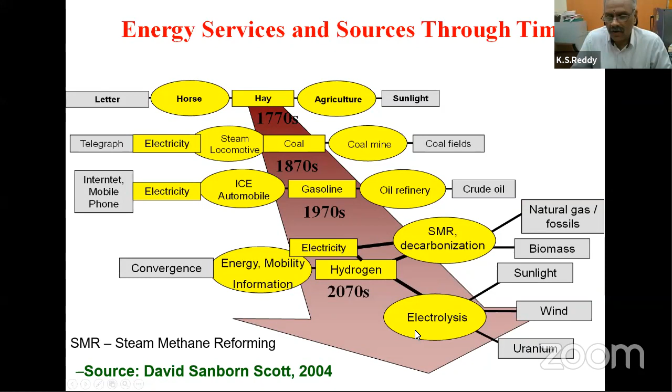Of course, there are various methods by which one can convert these into secondary forms of energy carriers. So I have listed here 2-3 energy conversion systems, mainly electrolysis, SMR, decarbonization, and so on.

So for human survival, basically three important requirements are air, water and food. Somehow we are getting air free of cost, though it's highly polluted, but still we are not paying for the air. Whereas for water and food, we are still paying, because water we cannot use directly from natural sources, so there is a huge energy requirement for treatment and so on. But food is available naturally, but we cannot eat it directly.

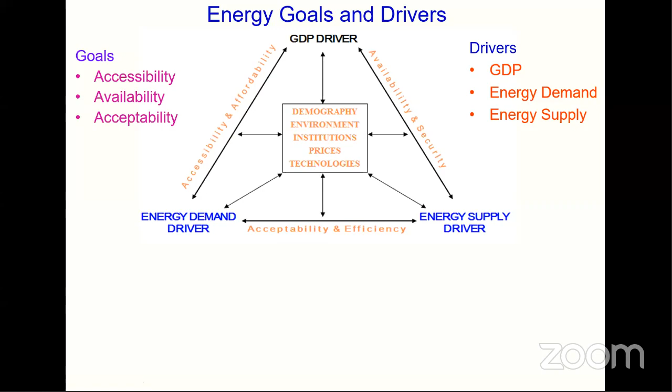Through these goals and drivers, though I mentioned the 3A criteria - accessibility, availability, acceptability - this is much bigger than that. It includes the 6A criteria: accessibility, affordability, acceptability, adoptability, and of course appropriateness, assurability of the energy sources for given energy demand or energy supply drivers or GDP drivers.

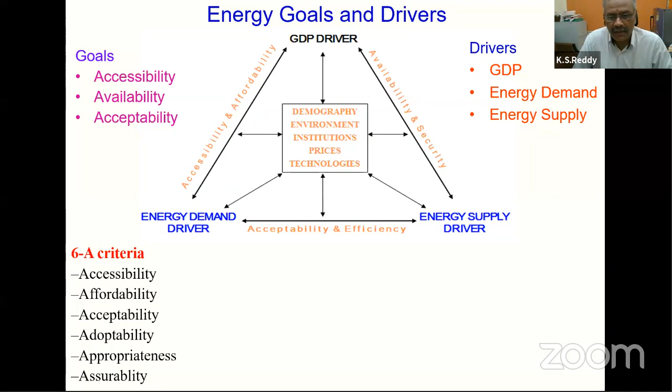So therefore, in order to have these energy sources, if you look at the global outlook, it's most importantly fossil-driven - the present energy scenario is driven by fossil fuels. Those fuels include coal, oil, gas, and of course nuclear. As far as India is concerned, we import all the energy resources.

We import coal from Indonesia, Australia, and South Africa. Oil, you know very well, comes from the Middle East. Gas also from the Middle East. Nuclear again from Australia and others.

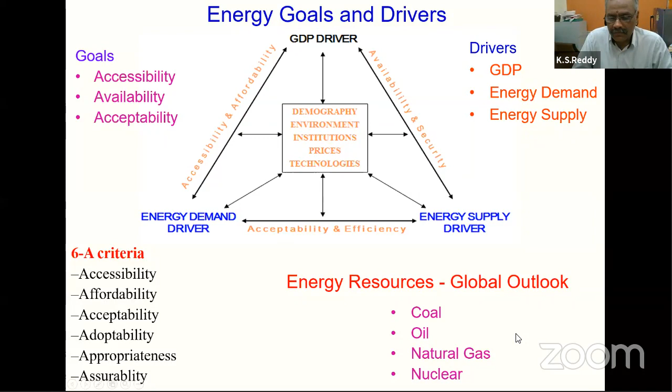Though we have limited nuclear installations, most of the energy supplied is based on fossil fuels. So the energy sources for mobility is very important, which is the present topic of interest. I will try to concentrate on how energy sources are important and what developments are happening in electric vehicles, mainly the activities taking place at IIT Madras in our group. The energy source for mobility is oil, and to some extent gas, but oil is very important, and the present scenario is based around oil as a fuel.

If you look at global oil reserves, it's estimated at about 1147 billion barrels, and you know very well how these are distributed. This distribution of oil is not uniform, so India still imports a lot, about 65 to 70% of the oil, from the Middle East and other countries for mobility applications and other utility.

The crude oil prices are highly volatile. Prices have ranged from, we have seen once, about $140 to $150. Now it is moderately less because of the supply-demand relation. In developing countries like India, where we don't have much oil reserves, the import is primarily driven by demand, and consumption is increasing day by day. So it's very important to take care of these things.

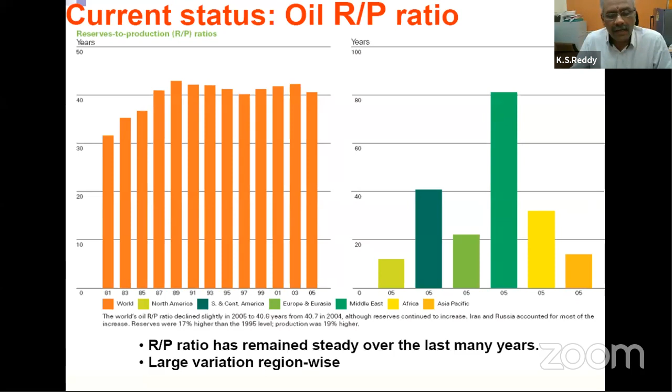So one should really look at alternative options for mobility, and the electric vehicle option would be one of the attractive options. For the oil scenario, we have technology which can drill deeper and deeper to exploit resources from even farther reserves, but the cost and economics is a major issue. The present technology can drill up to 1.7 kilometers deeper and still get results.

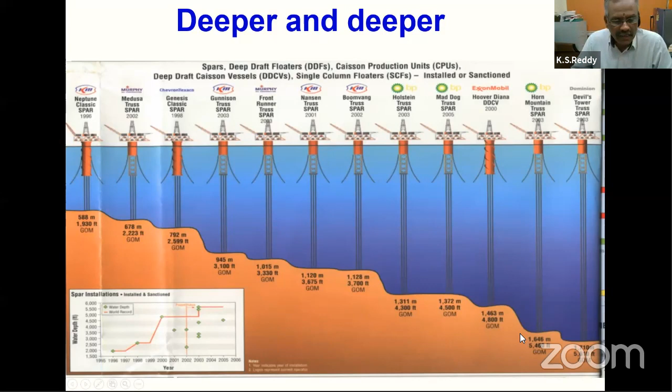The fuel is also, as I mentioned, about 70% imported oil, so most of these vehicles are driven by foreign oil. This is not Indian technology, so we have the money to afford to buy it and to afford to buy the fuel, which is also not Indian fuel. So we are using foreign fuel, foreign technology, operating on improper or poor infrastructure—mainly roads and other things—which results in polluting the Indian environment.

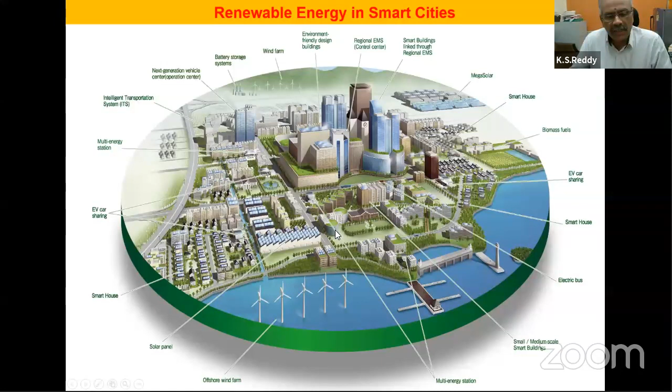You have to conserve your earth by going for alternative methods. We conserve through electric mobility, which is a non-polluting or less polluting option. Therefore, renewable energy options in smart cities are very important. You can cover the city with various renewable energy sources and use them for charging stations and catering to the needs of the system.

If you go for mobility, there are alternative and transitional energy sources for transportation. This includes renewable energy for transportation, covering both transient-with-storage and only-storage options. Transient options are very simple in construction, using active systems, but have lesser reliability and are not suitable for frequent use, with less maintenance and low capacity applications.

With transient and storage systems, we have relatively better reliability, active and passive systems, and reasonable simplicity, with possibility of storage and compactability, suitable for long travel but with relatively high maintenance. Only-storage systems are very simple but challenging, with high reliability, and most of them are passive systems.

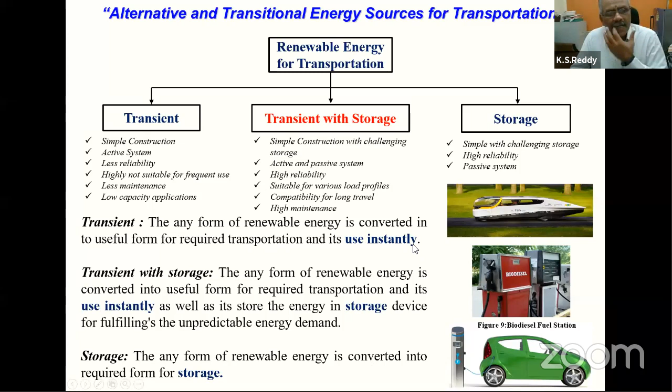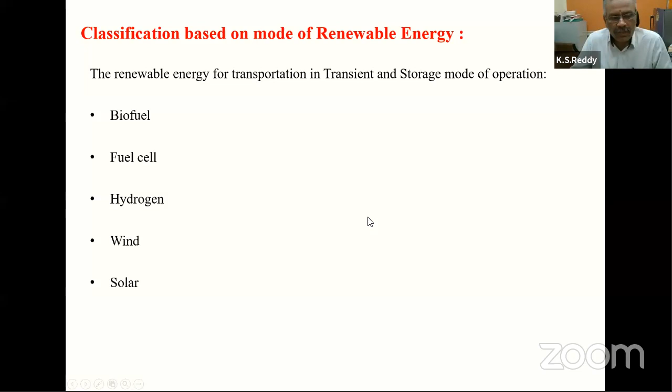Transient systems are generally used instantaneously, whereas transient-and-storage systems are used both instantaneously and for storage, and storage-only means completely based on storage, converting renewables into required energy storage for later use. The classification of these renewable energy sources includes biofuels, fuel cells, hydrogen, wind and solar energies for transportation. Wind and solar energies have been in practice for a long time for mobility.

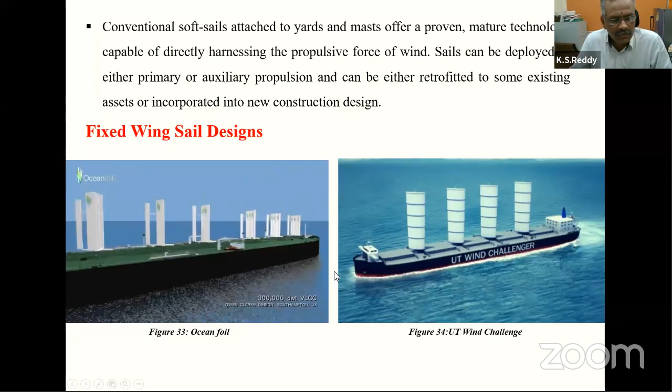One of the most ancient mobility applications is sea transport, where air or wind is used to drive these vessels, and to some extent it is still important today. Ships or boats use this for mobility and transport applications. Ships using rotor sails can travel larger distances, utilizing the Magnus effect, which is a vertical-type wind turbine effect used to move from one location to another, mainly in sea transport.

And there are fixed wings with solar PV hybrid panels. You can drive sea transport with solar panels as well, and they are now becoming popular. We can still use solar energy for long-term or long-range mobility applications.

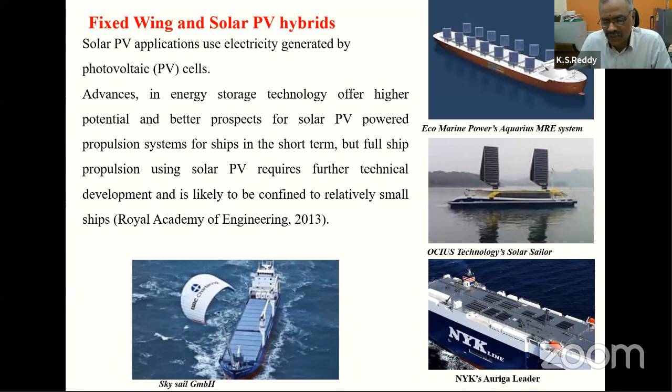Biofuels are also very important. They are referred to as carbon neutral fuels, or biofuels as a renewable source. We have a wide variety of options for bioenergy conversion. Generally, biofuel is produced mainly from the sun, so biofuels are also a manifestation of solar energy.

You can see sunlight, carbon dioxide, water. Photosynthesis is the major process for converting solar energy into biomass, and this biomass is converted into various cultivatable and non-cultivatable biomasses, and some waste. Ultimately, you can convert these into useful fuel, which can even be blended with fossil fuels and so on.

Biodiesel is one of the important options for this, and this is a complete carbon cycle. We call it a circular economy, which results in completing the cycle, including various blending of biodiesels with diesel fuels. In India, Indian Railways uses biodiesel to a large extent, which can be stored and used safely at relatively higher temperatures.

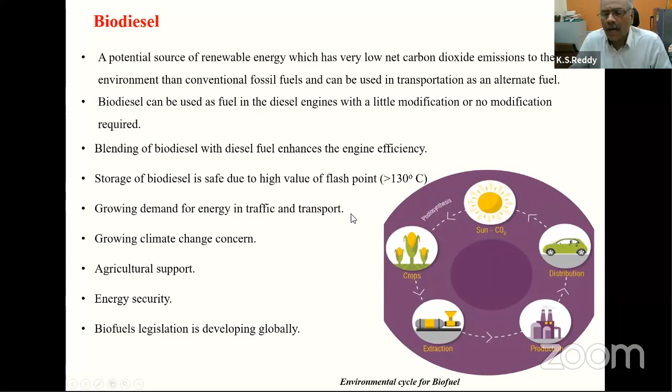The demand is growing mainly for traffic and transportation, and climate change is the major concern. There should also be good agricultural support and energy security, and biofuel has a good role in mobility applications.

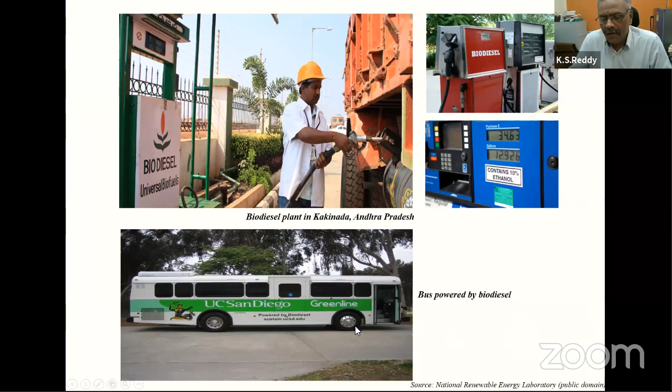There are several countries using biodiesel in commercial vehicles. You can see this biodiesel plant in Kakinada, Andhra Pradesh, one of those plants for biodiesel vehicles. Fuel cell technology is a kind of hybrid indirect electrochemical device which converts chemical energy of the fuels, mainly hydrogen.

Hydrogen is the highest form of fossil fuels, so if the hydrogen content is higher, it would be better, and it reacts accordingly. There are a wide variety of fuel cells which can drive mobility or transportation vehicles.

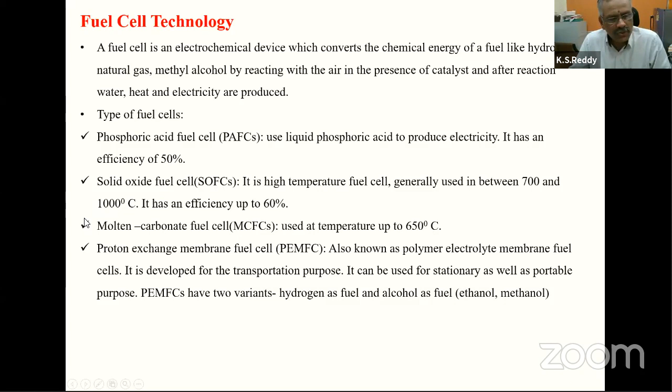Some of them are listed here, including PEM fuel cell, phosphoric acid fuel cell, solid oxide fuel cells, molten carbonate fuel cells, and proton exchange fuel cells. These fuel cells, depending upon capacity and operating conditions, mainly temperature and other parameters, are used, but I am not going into detail on how they work.

A couple of days back, I saw that Hyundai has developed a fuel cell truck, which I think is the world's largest fuel cell truck.

This is one of the good options. But we can also have a transient form of energy stored in batteries, or stored in hydrogen, or we can have a mixed combination.

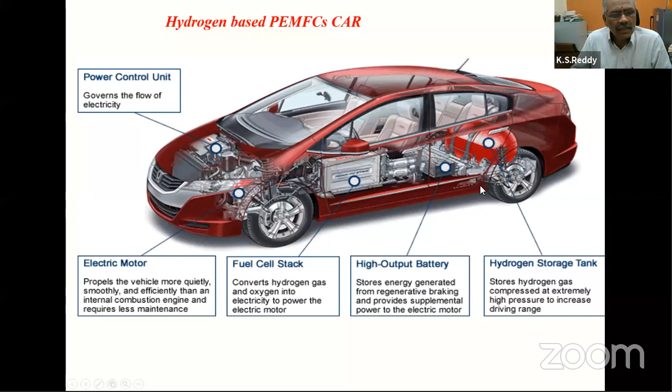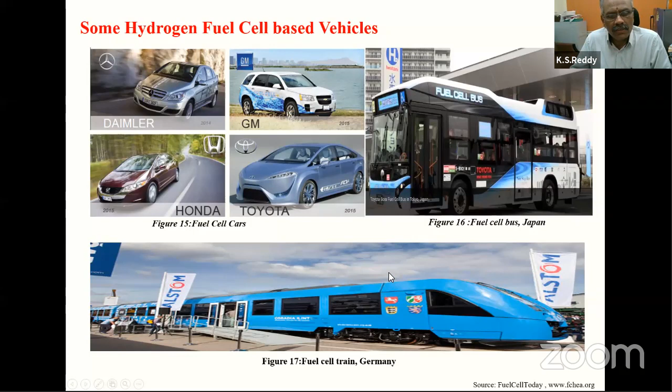These are some fuel cell based cars, not only cars, but buses and trains. Alstom also developed a fuel cell based train and so on. So there is huge potential. We have seen this in sea transportation and surface transport.

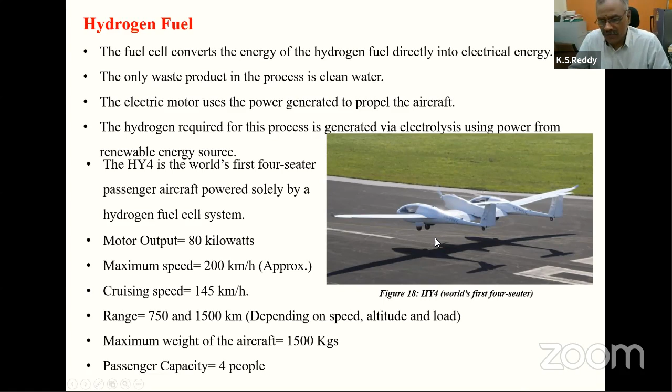Not only sea and surface transport, we also have transport in air, that is airplanes based on hydrogen fuel cell as well as electric mobility. I have given some details here. It's a small passenger aircraft which can accommodate 4 people with a reasonably good flying range, and it can be used for this, so eventually it has to become popular.

At IIT Madras we are also working on various indigenous technology developments. I will list out some of these, and I will also show one electric mobility vehicle which we developed. Our group mainly focuses on indigenous technology development, because if we develop our own technology, it will be useful for India, and we can generate revenue out of our own technologies and use them for Indian conditions. As part of that, we have developed about 20 technologies. They have reached the commercialization stage, and some have already been commercialized by our industrial associates and are in the market.

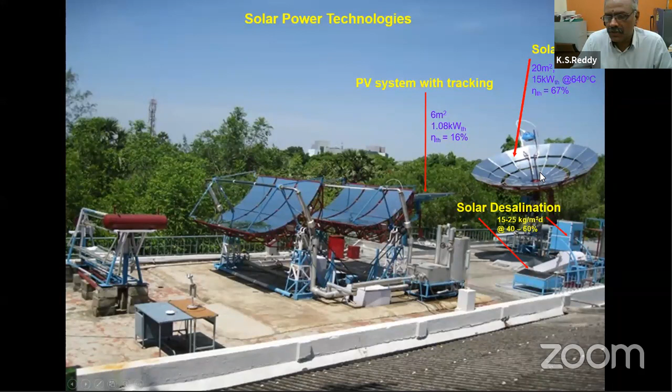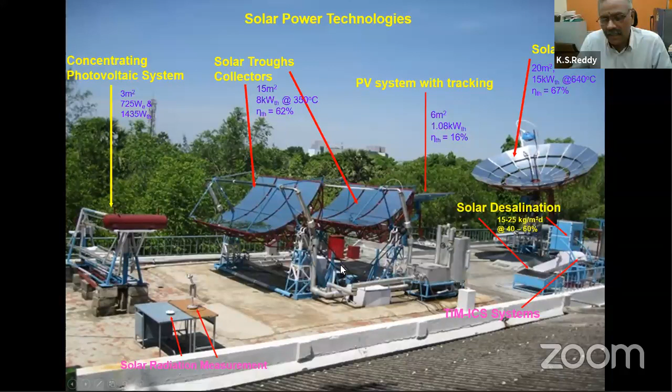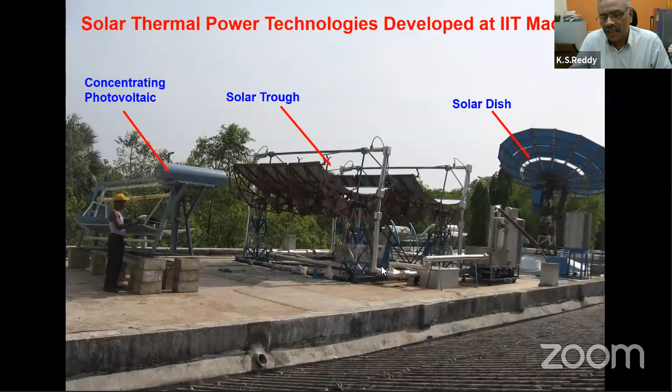Most of these are at the technology demonstration scale, and our 4D approach makes these systems ready to deploy in the field directly. So most of our systems are at the technology demonstration stage at the lab itself, so they can easily be taken to the field. These are some of the technologies - you can see, with respect to a person for scale, they are reasonably bigger sizes. Most of the operating characteristics are evaluated at the lab, and then they are taken to the field for integration and subsequent commercialization.

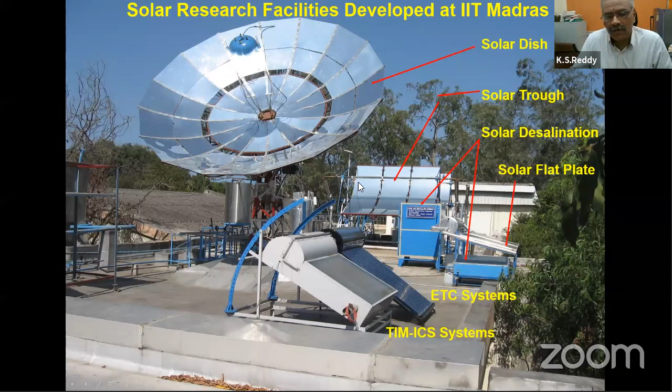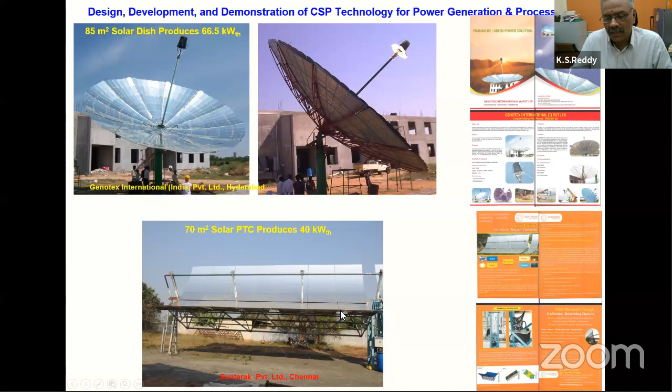This is another view of our systems - integrated collector storage systems, ETC systems, flat plate desalination, big dish, trough, and so on. These are some of my industrial associates who have commercialized our systems. You can see this one placed in a pharmaceutical industry, this one in another industry, and these are the brochures for their marketing and publicity.

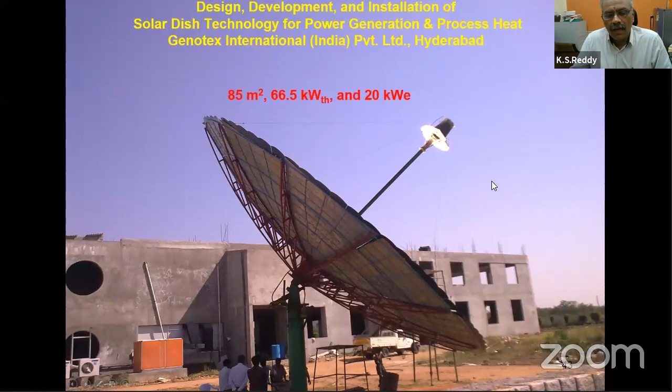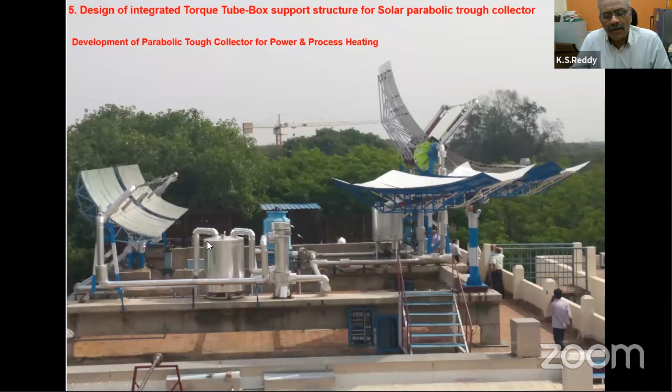Another technology which we implemented in a school, which we call the Pathashala campus near Kanchipuram district, Vallipuram - this is solar with a storage system.

Storage. You can see here, these are the oil and water storage, and this can cater the needs of the school, not only electrical needs, but also heat needs. There is process heat for cooking and other process heating applications like utensil cleaning and air conditioning applications. This is about 70 kilometers from Chennai.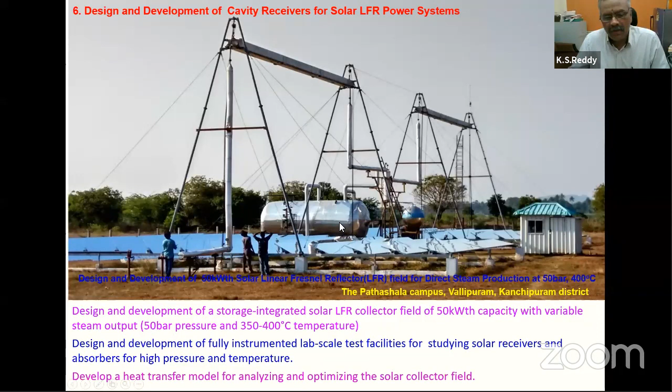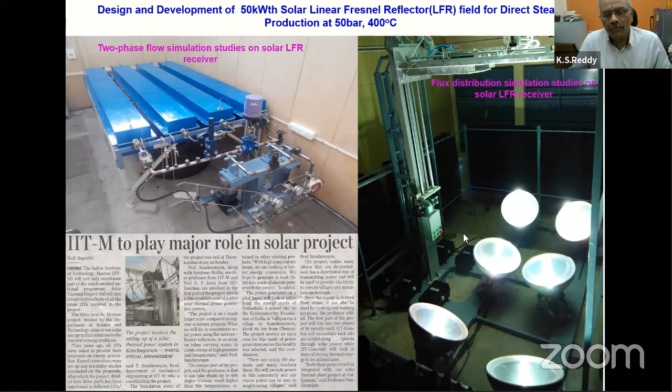And we have been working actively on development of CSP in various, these are our in-house simulators, which can even go up to 50 bar and 400 degrees Celsius.

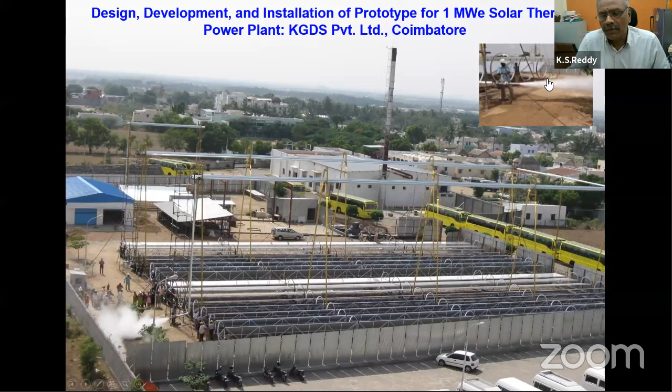This is another system which our industrial associate installed in Coimbatore, which can produce steam. You can see that. This concentrates solar energy into heat and then subsequently steam. And this steam can also be used to produce hydrogen for mobility application. You can see here how steam is coming out of this.

And further developments on dish for PV, CPV and hydrogen applications.

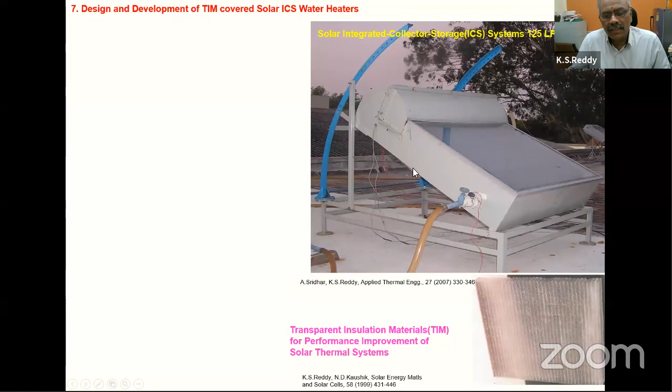Process heat application is very important, so we have developed a process heat system which converts solar into process heat, and maybe for desalination and potable hot water production.

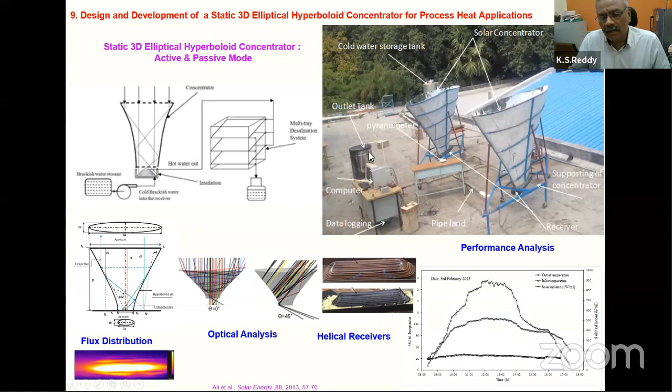As I mentioned, apart from food and air, water is also very important. Water is not available in natural reservoirs or natural water bodies, so we need to treat it. We have come up with a desalination system which converts seawater into potable water and so on.

You can see that this developed system is a multi-tray desalination system which can handle not only seawater, but also wastewater, and can easily produce better water yield, which can even range up to 50 liters per meter square per day.

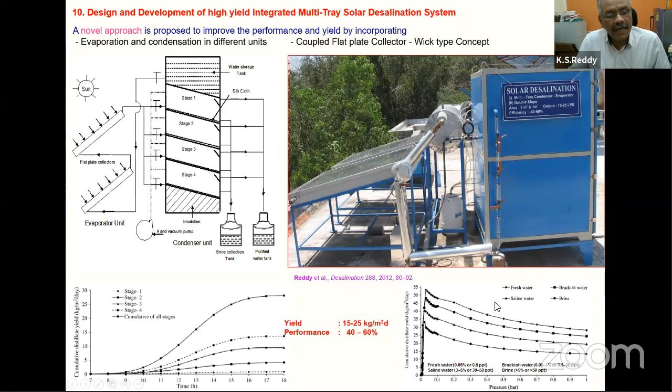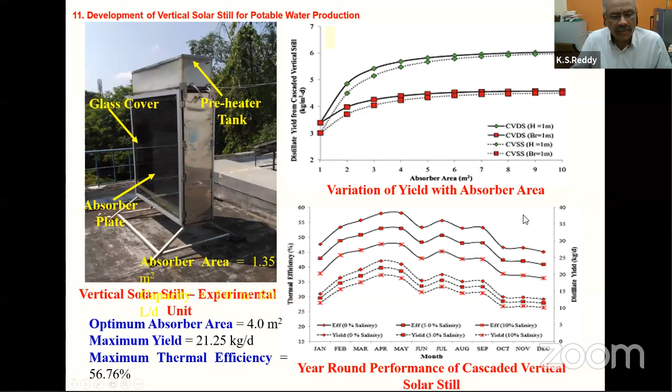Subsequently, we came up with another desalination system. It's called vertical still, a simple still, generally employed on board. When fishermen go into the sea, they need water, so we can produce on-board water by using such systems, maybe on a boat or so.

And this is another flat type of desalination system. It's a solar still with staggered basins, so multiple basins are used, and its efficiency is much higher, and so on.

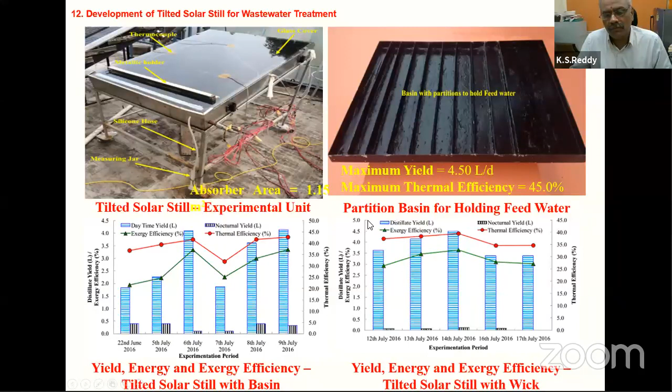And this is one important thing: presently India is mainly focusing on indigenous technology, Make in India, and mainly Swachh Bharat, Clean India, and so on. As a part of that, we have developed a solar system which converts human waste into fertilizer, and it is used for treating solid municipal waste and so on.

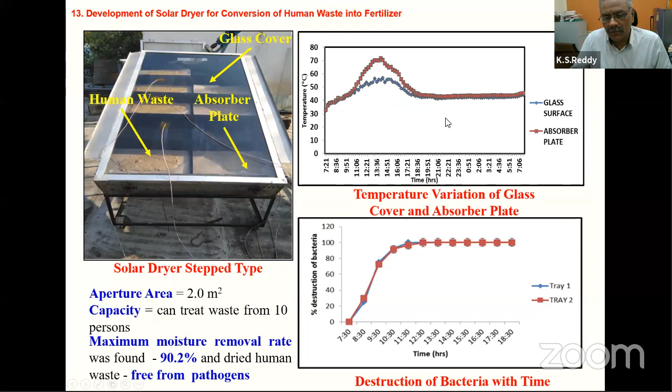And as a part of that, we have developed a kind of—I will show you it later—we have developed a net zero discharge, zero solid, zero liquid discharge toilet under the Swachh Bharat scheme.

So this next one is textile effluent treatment by solar energy. You can use solar energy for treating textile effluents, and you know that India is the largest exporter of textiles and produces a lot of textiles. There are several textile hubs, and they generate wastewater, but that wastewater is now being released into agricultural fields, resulting in land pollution and so on.

So in order to cater to that, the present Ministry of Environment has stringent norms, and therefore we have developed this and installed it in Tirupur, which is a textile hub, in order to treat the wastewater produced from the textile industry.

And now for habitation, you mainly know that residential sector energy consumption is substantially higher.

And so therefore, we have to come up with an affordable net zero energy building where the building itself is an energy source as well as a consumer, so that if we come up with a modular structure for this kind of environment, it is very important.

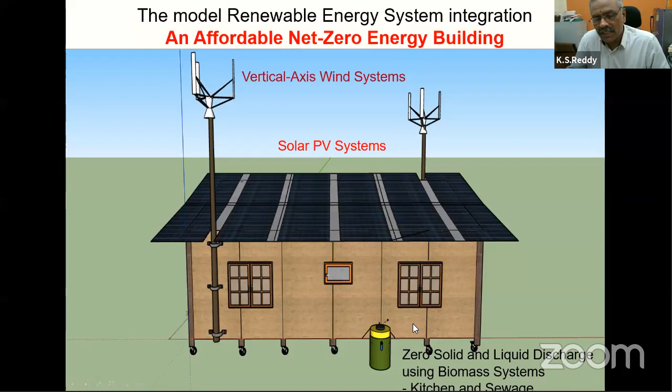As a part of our Indo-Canadian project, we have developed a net zero energy building, which consists of solar panels and windmills and of course waste treatment, solid and liquid. This is completely pollution free. There's no energy coming in and no energy going out. There can be possibility of energy going out, but there's no solid waste or liquid waste going out of this.

This is one such system, a conceptual one I am showing. A real system is under construction, and this is a typical system.

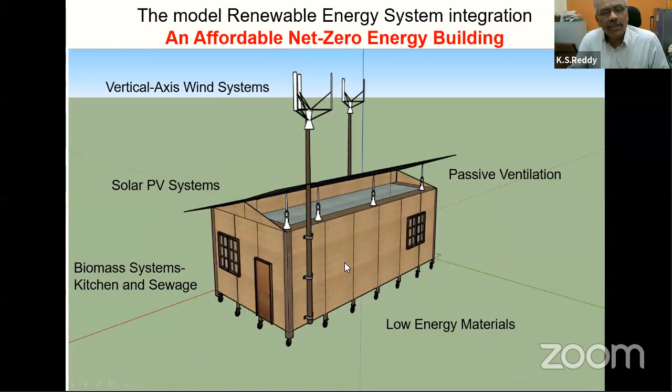As I mentioned, as a part of this cleanliness effort, we have developed a net zero discharge toilet, and it's installed in one of our students' hostels, the Krishna hostel. This doesn't liberate either liquid discharge or solid discharge. So therefore, complete liquids and solids are recycled and used for internal purposes, and it's completely hermetically sealed. There is no smell, nothing will come out of this. We have already commercialized it and given it to the industries.

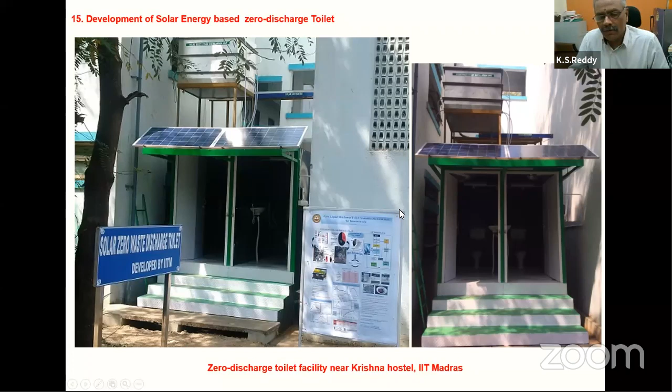The other one is an integrated renewable energy system, which can be used for mobility applications also. We have installed this in a village close to Shantiniketan, in West Bengal, Rabindranath Tagore's place. This system includes biomass, batteries and solar panels, and it's an integrated system.

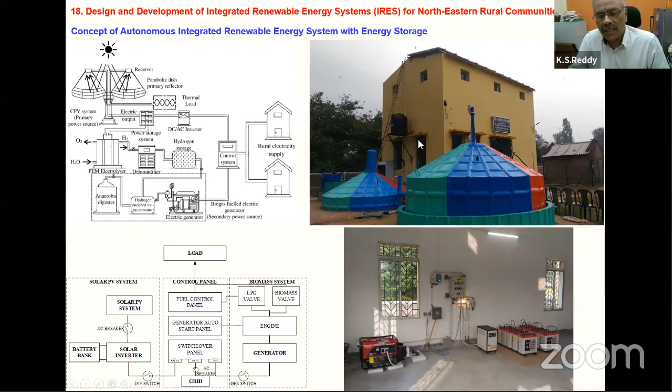The biogas is used to drive this engine and then produces electricity. So we have developed complete control systems for this, and this caters to a village which does not have any access to electricity. About 60 families are using this, and it's working well. These are complete grid integration systems with biogas and other things.

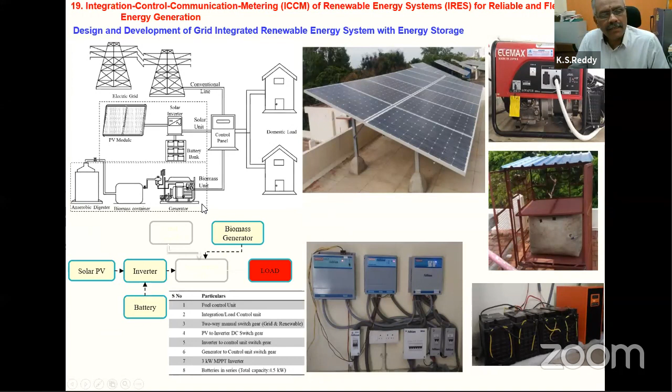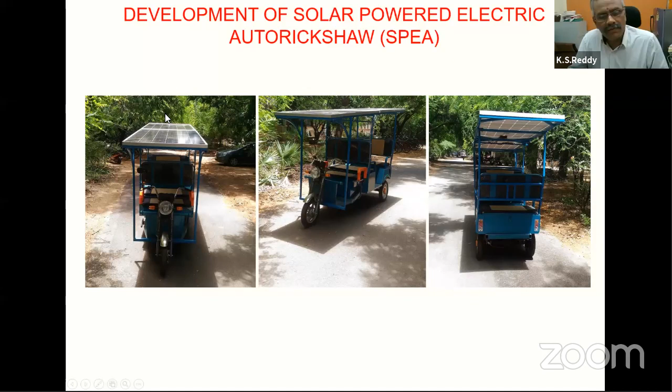And this is the mobility development of a solar powered electric auto rickshaw. It's an electric vehicle which we developed to run using solar panels which are on top of this. I will show you the details.

Solar panels are used, and the electricity produced from solar panels is controlled, and sometimes directly used, and sometimes stored in the batteries. So eventually you run completely this on solar technology. Brushless direct current electric motors are used, and MPPT is a maximum power point tracking system, in order to get the maximum output and so on.

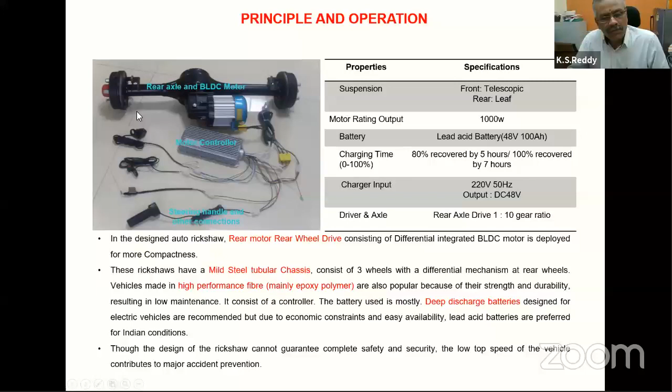These are the chassis, made like a mild steel tubular chassis with high performance fiber, and all these deep discharge batteries are used. You can see how this is built structurally, and one of my MS students worked on this.

He developed this sloped roof where we can place these panels, and the aerodynamics is studied, because if by placing these panels the drag is significant, it may consume a large amount of the energy produced. So therefore we should have minimum drag, so that the stability is also improved, with minimum energy consumption and so on.

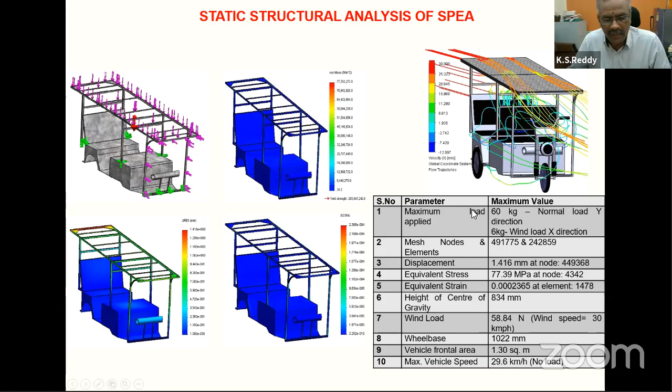So we have done structural analysis of this solar powered electric vehicle, and we have seen how the energy charging and discharging varies with time, and if run on an annual basis, how energy is produced throughout the year. This is compared and used here, with variation across different timings, and with the PV output, showing how it can be integrated with the mobility vehicle throughout the year. Because essentially we have to come up with a good economic model.

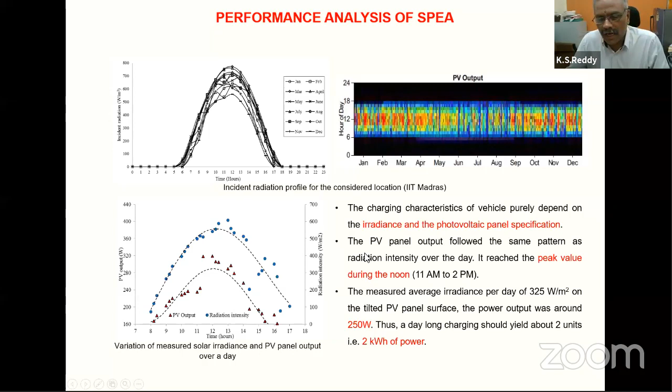This is the performance analysis of the system. Our students did a lot of load analysis by sitting - with no load, with 1 person, with some load, 3 persons, and 6 persons - to see how the battery discharge rate happens. This has been studied, and their respective mileage is also reported here. You can see that, and accordingly what is the power consumption and all those things have been studied.

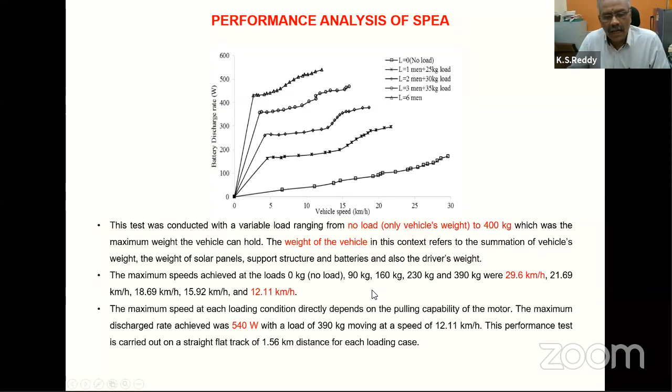Then we have to compare with the economic model with the present options, which is the auto rickshaw. So comparing the two, not only from an energy point of view but also cost, we call this 4E: energy, exergy, environment, and economic analysis. Environmentally, how many tons of carbon dioxide is released throughout its lifetime, say over a 20 year work span, has been compared in terms of energy and environment.

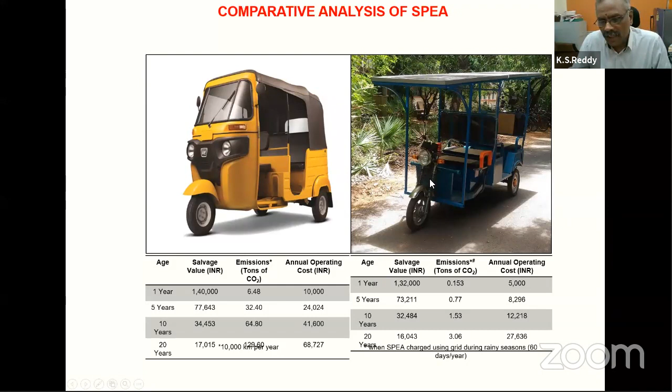This solar energy powered electric vehicle is more attractive as compared to the present options. If we implement this with even further aesthetic improvement, I think it can be used better.

If you look at the economic analysis, as I mentioned, there's significant economic benefit. The yearly income as compared to the gasoline based auto rickshaw seems to be better. We can see the comparison between the solar vehicle and the cumulative cash flows. There is a good option for revenue generation from these electric vehicles, with reasonably good payback - somewhere around 3.5 years, or maximum 4 years - and whatever is the rest is profit.

It's also compared with environmental impacts of CNG, gasoline, and LPG driven vehicles, and these electric vehicles have minimum environmental impact. If you compare vehicle lifetime of 20-25 years, the emissions produced are substantial per unit liter of fuel. You can see these numbers given here.

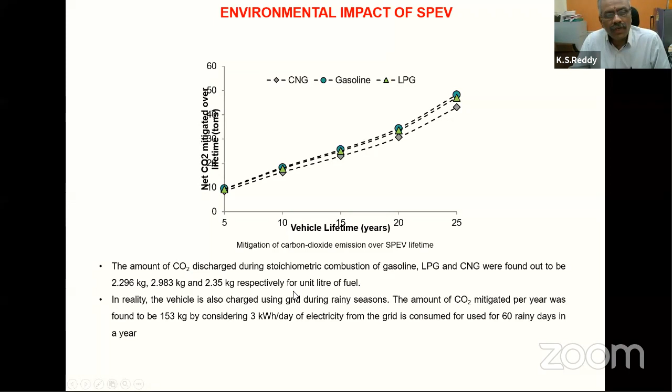On a yearly basis, the carbon dioxide mitigation through these electric vehicles is very important - you can see 153 kgs, considering about 3 kilowatt hour per day, over 60 days and so on. So electrical mobility is very important, and you can see it looks like this.

This is when they were doing the load test - some of my students sat here and tested it in the campus. If you have a clear comparison, which I have shown here, this is the summary. Based on the input parameters, the payback period was found to be about 4.5 years for the gasoline vehicle, whereas 3.4 years for the solar powered vehicle, giving lesser payback and more energy output.

These are again the specifications which I have already shown. Solar panels are placed on these, which also improves the stability and performance. These are the specifications of the battery, whose efficiency is shown here, and the motor - as I mentioned, there is a 1 kilowatt motor and so on.

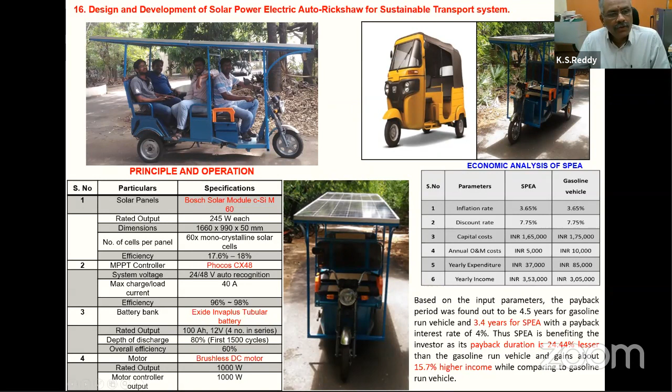The advantages of this are zero greenhouse gas emissions, reduction in energy cost, and relatively less noise, with an unlimited source of energy which is indigenous - we need not import from the Middle East. Solar energy is available in India, so nobody can stop using the free solar energy. Nobody can shield our sun - it's our sun, though not our oil, but it's our sun. It's an unlimited source which can effectively be used either in electric form or through hydrogen production.

This is my group which has been involved in developing these technologies. Most of them are my PhD, MS, and undergraduate students - mostly MS and PhD students alone. We have a big group working on developing this.

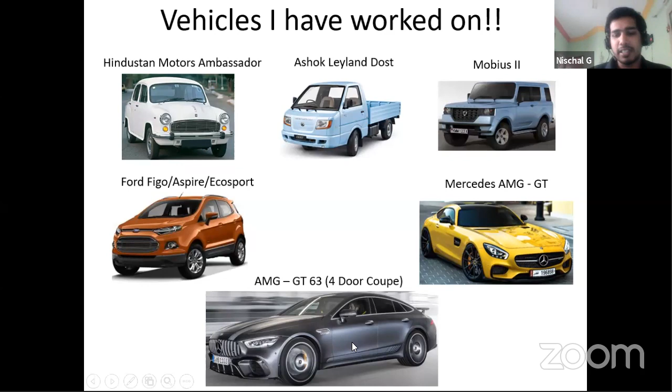Many of you might know that electric vehicles have been there. We have been talking for quite some time about what is going to happen with electric vehicles. But I wanted people to know on what basis we came to this situation. We all know people have been talking about electric vehicles probably since 2010, when Tesla almost came up with the Model S and they were claiming a lot of things. But there was hardly any activity before 2009, 2008 and before. There was some, but we are going to talk about how things emerged from nothing and grew exponentially, and within 15 to 20 years, the whole industry has taken a major shift, and on what basis.

Then again, we'll talk about the challenges of EVs in India. So when I say EVs, it is 2-wheeler, 4-wheeler, 3-wheeler, buses, trucks and all. And then what are the short-term and long-term goals that should be targeted in India, especially in India.

So this is a very brief history of electric vehicles. Electric car is nothing new. It has got a history of almost 125 to 130 years, which was developed in London, which was the powerhouse of the world at that point of time. But sooner or later in the 20th century, when we came up to 1910, 1912, the automobile started gaining a lot of momentum with IC engines, and battery technology did not develop at all. It was more stagnated. So then the IC engine technology just left the electric vehicles in the dust, and they just instantly perished, I would say, in a span of 6 to 7 years.

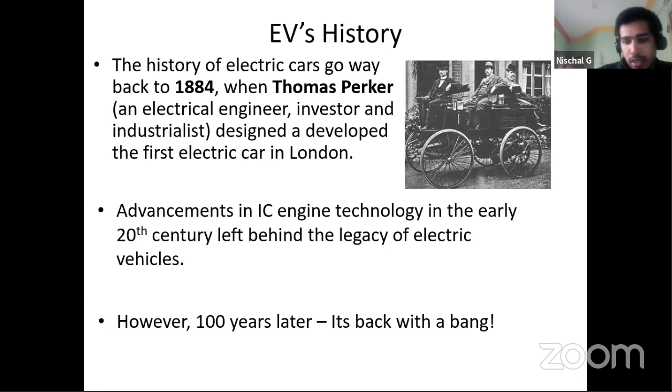This is what I call the California effect. For those who know California, it's a state in the United States, and California is known for the world's most stringent pollution norms. It has got levels - for example, now we are in BS6, and in Europe, in some places, they are talking about Euro 7 and 7B. In similar terms, US is there, but California is always a step ahead, more stringent than the US or Europe or rest of the world. So that's why California - basically it's the most stringent pollution norm check in the world, and everyone targets to meet the California regulations. So why is California so special, and why did things start at California?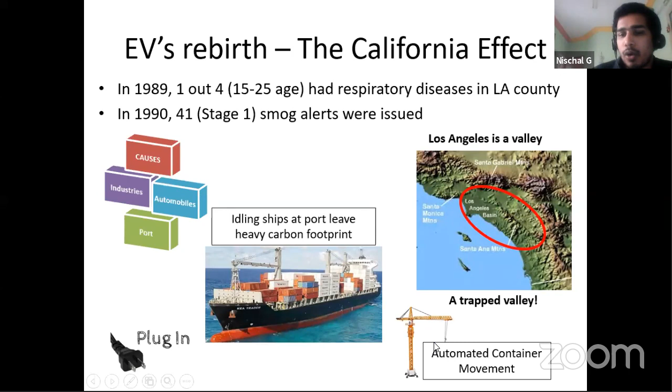And also they came up with automated container movement. These things were hardly there at that point of time—we are talking about the 1980s and 1990s. So they came up with this also, which actually improved the loading and unloading time, and thus the ships need not stay in the port for a longer time, hence reducing the pollution.

And then we talked about what about pollution from cars, right? So we talked about industry, we talked about ports, and now we are talking about automobiles. For industries, anyhow, California was one of the first counties to take a call on putting up filters and such things on the chimneys to reduce pollution. But let's not go into that—we are focusing on electric vehicles. Let's see what happens.

What about cars? 28% of California's carbon emissions are from cars—this is the latest, 2017 report. In 1997, this is where it all started, when there was a lot of pollution and such. California law said that 2% of newly sold vehicles should have zero emissions. When we say zero emissions, it cannot be a hybrid—it has to be either a hydrogen-based vehicle or a battery. Zero emissions means a vehicle running on the road should not emit pollution on the road or in the garage. But the source of pollution can be somewhere else, because we are talking about a localized issue of pollution in the state. That's the reason they are looking into this.

Citing this, General Motors came up with a new vehicle called the EV1. They had a very limited launch of 288 vehicles, followed by Honda and Toyota. This was around 1996, because governments, when they put up a rule, discuss with all the automotive manufacturers, since emissions, losses, manufacturing, and the whole economy go hand in hand. The EV1 had a range of 190 kilometers, which was very good at that point of time. But practically, the claims by the government or automobile firms are relatively higher, because they are tested in a very standard setup. The practical range was 130 kilometers, which I would say is fair enough at that point of time.

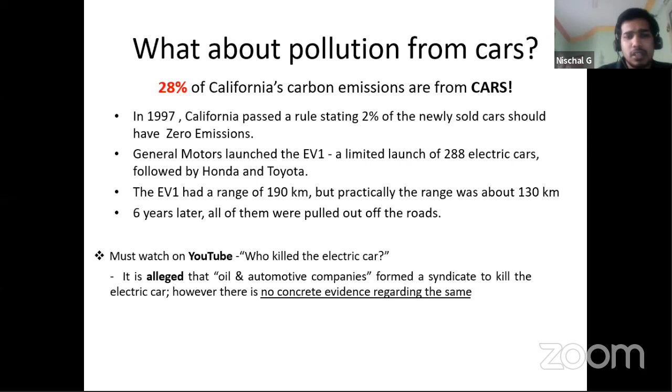So I would suggest everyone to have a look at this documentary. So this was around, so all the cars were approximately pulled back by 2003, 2004.

And again in 2012, a decade later, California, Tesla was launched in California again. Tesla was there since 2003, 2004, where they had the Roadster. But 2012 was the changing time when the Model S was launched, because this was the first car in the production variant which did not belong to any major automobile firm.

And that actually caused a big challenge right on the face of every manufacturer in the world, saying, 'See, I have done this, what have you got?'

Okay, so now when we talk about electric vehicles, there are different types of markets that we first have to understand before going into our country-specific situation.

Now when we talk about Tesla, last year it captured only with the Model 3 — we're not talking about other variants. When you talk about different manufacturers, they have so many variants of cars, but Tesla has only one model in that medium and small size segment, which is the Model 3. And that itself, only one model captured 23% of the market share.

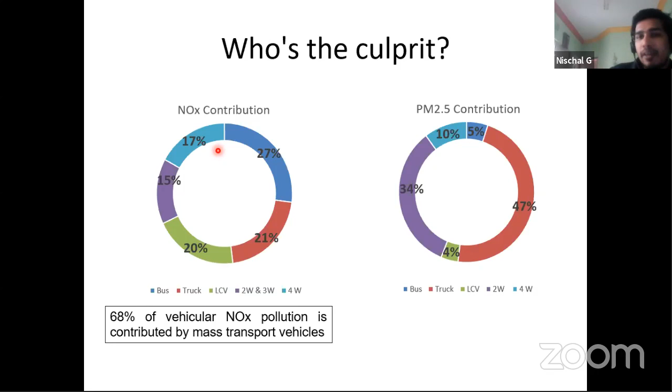Now let's talk about PM 2.5, which causes a big issue every year in Delhi, the particulate matter. You can see that 47% of the particulate matter is contributed by trucks, and the next major contributor is two-wheelers. Combined, they account for approximately 80%.

But again, who does everyone target? We are talking about cars. Generally, car manufacturers are the first ones who are targeted, and then we see that they're contributing only 10%. So this has to make us think, is this the right direction where we want to head? Is this where we want to be in 2030, 2040, 2050? Are we missing some information, or why is the government behaving like this? We'll discuss each parameter, each contributor, who is doing what, and what can be done.

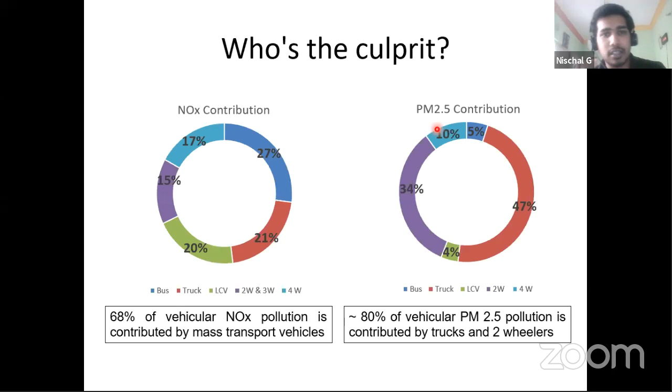Let us start with the bus, because as we saw, the bus is one of the major contributors for NOx emissions. What can be done for buses, or what is being done?

There was a case study done by BMTC, Bangalore's state road transportation corporation, which runs a lot of buses in Bangalore. They did a feasibility check for electric buses and bought buses from BYD, a Chinese company which is by far the largest electric bus manufacturer in the world. No one is even 10% close to what BYD is in China currently. But of course, the bus is assembled in Hyderabad. After BMTC did the trial run, they concluded that they saved approximately 50% of cost, or earned more than 50% of the cost, based on the diesel counterpart.

When we talk about running costs, we'll go to the next slide and see what's next. Just a couple of weeks back, BMTC called for tenders for 90 e-buses based on these results, and they've done a few more feasibility studies. Based on the results, they ordered 90 more buses, scheduled to be delivered by the end of this year or beginning of next year.

When we talk about buses, we cannot compare a smaller bus to a bigger bus; we have to compare apple to apple. One of the key things you can see here is the seating capacity. This is a CNG bus, and while we don't have a bigger number for comparison, almost every bus has the same seating capacity, and more or less the same length, width, and weight.

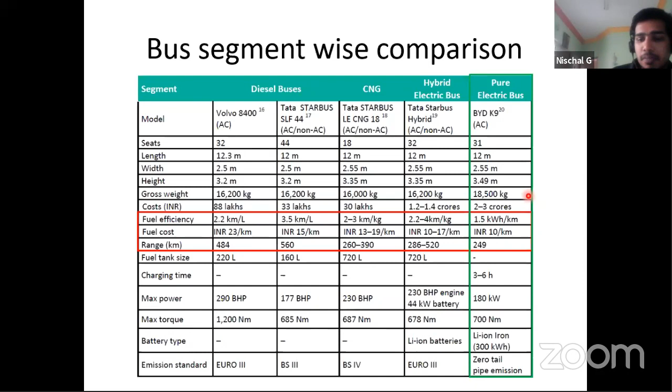And the second most important thing is, let us assume the government wants to do it - they said okay, there's too much pollution, let me put up money. But do we have that amount of money to buy, say, 10 buses for 30 crores and get the money back? That's a big challenge. So that's the reason there is something called bridging the gap.

That's what we are going to look at slowly in the PPT. So there is something called opportunity charging. This is something new that has been developed recently in Europe over the last few years. So this is how it looks and how it works.

So this is the bus. The bus will have a pantograph - pantograph is nothing but like what you see on electric vehicles or electric trains, the one above the head. And then we have this black one, which is the charging station. And then we have civil works, or a backup place where we convert all this electricity into volts and kilowatt amperes and all these things that we require. Okay, I'll just quickly play a short video.

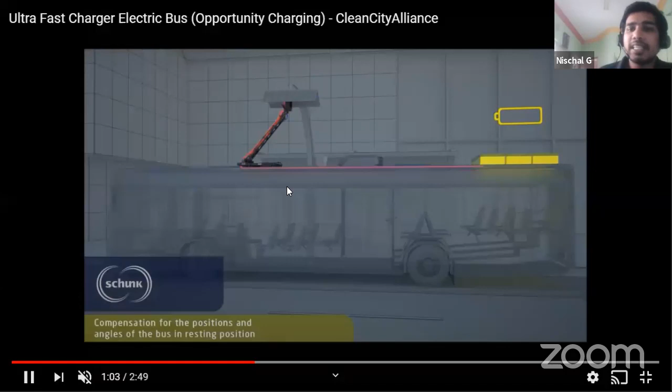So this is a technology that is still being developed, of course. And I have actually seen this technology when I was in Netherlands, in Eindhoven.

What happens is, at this point in time, every bus stops at a stop for say 15 or 20 seconds. So the goal is to charge the bus in that time. As you can see, there's a second type of charging port beneath the bus, not above it. Everything is electronically controlled, and these 15 seconds play a major role in charging the bus.

We previously talked about the BYD bus, which has a range of 250 kilometers, but this bus has a smaller battery. We're not talking about 250 kilometers, we're talking about 15, 5, or 10 kilometers. One of the major weights in buses or any electric vehicle is the battery pack.

Because we're using opportunity charging, it's pretty simple - whenever we have the opportunity to charge the vehicle, we charge it. The bus leaves the depot with a full charge, but it has a relatively smaller battery. Instead of 300 kilowatt hours, it'll have say 40 or 30 kilowatt hours, and this is good enough for the vehicle to go 15 to 18 kilometers.

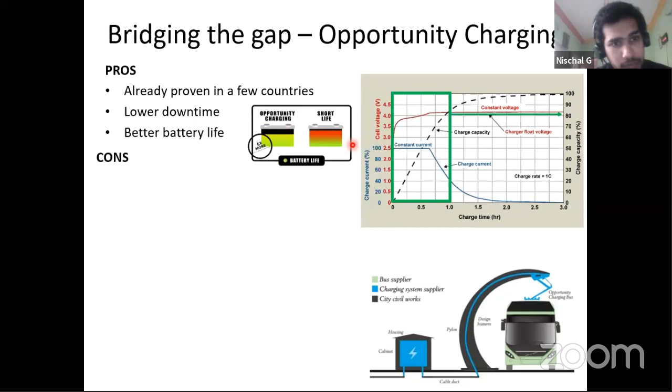But of course this has its cons also. It has a high infrastructure cost. When you compare it to a standard electric bus, you need the extra high power lines and all these things only at one spot, which is the depot. But that's not the case here, you need to have this setup at each and every bus stop. I would say in Bangalore we have easily more than 150, say 200 bus stops. So assuming we want to do everything with opportunity charging, we are talking about electrifying 200 bus stops. There is a huge amount of investment that has to go in if we want this kind of model to work. And ideally that is not the best case for India, because you can talk about currency value and all these things, but in all terms it's not the best investment, I would say.

Okay, so now what is the proposal? We talked about opportunity charging, which is good, but it is expensive. But what can we do?

So I came up with a proposal: why not give it a try for the BRTS line, bus rapid transportation system, which exists in approximately 24 cities in India. Six out of these 24 cities have more than 100 kilometers of network. Delhi has 115, Indore has 126, Bhopal has 186, and Tiruchirappalli has 112.

When we talk about opportunity charging, it is relatively risky on standard roads, especially with huge vehicles in India coming into smaller roads, which might damage the charging stations. But when you have a BRTS, these lines are dedicated only for buses, so bigger vehicles will not come, and they can actually use opportunity charging for the buses in the BRTS line. So this is one kind of proposal that can be worked out in India.

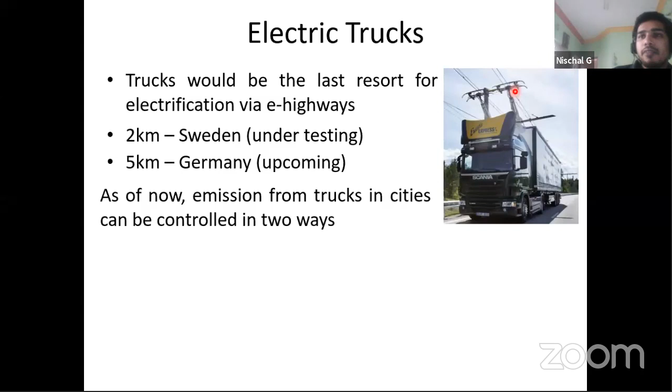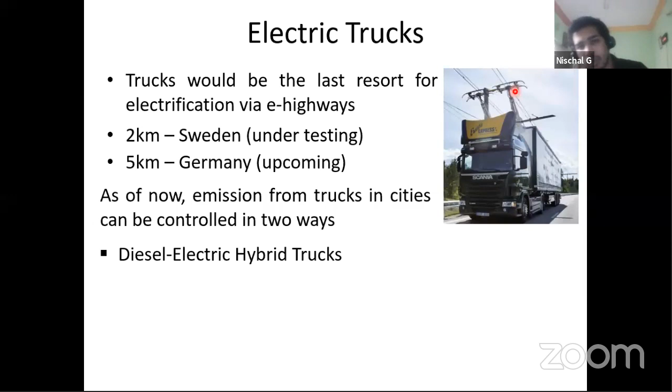Now we talked about trucks, and we saw in previous slides that trucks are also a major contributor to particulate matter emissions. There was a study conducted on India. This is the diesel-electric hybrid we discussed, but we were talking about how to reduce pollution from electric trucks or trucks in India. As of now, this isn't possible straight away - we might get BS6, we might get BS7, but some amount of pollution, maybe lesser, will still persist in India.

The study said that if trucks are diverted, because Bangalore is on the border of Tamil Nadu and Karnataka, and is also a way through to Andhra Pradesh, this city acts like a junction for all the major routes. I would say some portion of trucks would be bypassing Bangalore only, with no business inside the city, just wanting to bypass it. That's the reason they came up with this peripheral ring road.

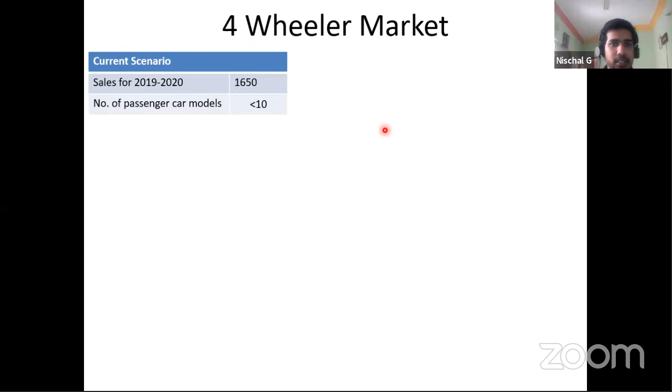So even though manufacturers are trying to come into India and they want to push electric vehicles, people are still not so keen to buy into it. There are certain reasons, certain challenges. So what is the challenge? We will talk about each and every sector of challenges. So what challenge does a consumer face? Consumer first thinks that...

I'm talking about price. More than 90% of the vehicles that are sold in India are less than 10 lakh rupees, are less than 4-meter range, and things like that. So the moment we are talking about sub 10 lakh rupee vehicles, I would say more than 60% of the electric vehicles fail to meet this criteria of the less than 10 lakh rupee range. So the consumer is left with hardly one or two models.

And on top of that, the consumer has range anxiety. So till now, whatever cars we had, at least till the recent launch of Nexon, the previous cars like Tata Tigor or Verito and so on, those cars had a practical range of only 80 or 100 kilometers per charge for a full charge.

And that's really not even close to what a consumer wants, so certainly the sales speak the numbers. And if a consumer wants to have a vehicle, an electric vehicle might be a second vehicle in India, but it will probably never be a primary vehicle, at least at this point of time.

When we combine all these three things, we are talking about practicality, which also includes power shortages and infrastructure capital. Then we are talking about commercial usage. In India we have a lot of abuse of vehicles. For example, you have a service cycle of 5,000 kilometers for servicing your vehicle - how many Indians actually get the vehicle serviced at 5,000?

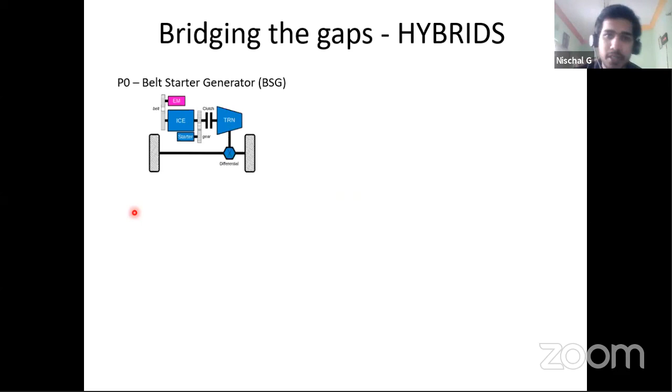So how can we do this? With electric vehicles we are talking about long-term gaps, but how can we bridge these gaps? So we have something called hybrids, which I'm sure everyone knows. I'll go very quickly because we are running out of time. We have 4 types of hybrids.

One is a P0 hybrid, which is nothing but a belt starter generator. When we talk about start-stop mechanism and all these things, we use a P0 hybrid. This is what you see in Mahindra and Suzuki cars. That's just the start-stop mechanism - it does not add anything.

Then we have the ISG. ISG does the start-stop mechanism, and also gives a very brief amount of power torque during acceleration. That's where we call it a mild hybrid. It's called P1. Okay, and then we have P2 and P3.

These are full hybrids, where the e-motor is attached after the clutch here. You can see that the e-motor is at the belt drive of the engine, so that is where it's used for start-stop. The e-motor is before the clutch and the transmission, so this is just after the IC engine.

This is just going to be a very small pack, going to assist in acceleration. Acceleration is where you use a good amount of fuel, so when your torque is added in acceleration, that means you are saving some amount of fuel. In full hybrids, what happens is, say for example, one axle is driven by the IC engine and gearbox, and the second can be run only by an e-motor. And the final thing is the range extender.

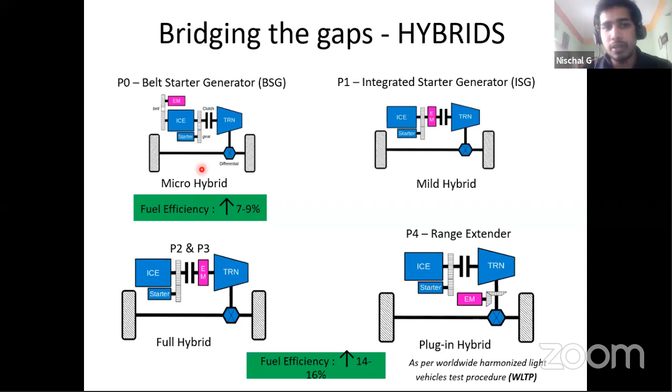What does the Indian government have? The Indian government has a FAME scheme. Now it is running in FAME 2, but we give this push for electric vehicles in terms of subsidy, which is around 10,000 crores. So what happens is, every time you're buying a Suzuki or a Mahindra which has a micro hybrid, you will get some discount. Of course, they'll give you the discounted price, but the government is actually giving you some incentive for buying these hybrid vehicles. So that's the current situation.

But what is the requirement? The requirement is that India has to push this opportunity charging, and this is again an opinion. They have to reduce the prices of infrastructure related to opportunity charging, the BRTS lanes which we talked about in the FAME scheme, and they have to reduce the potential infrastructure cost, which is the biggest issue for implementing this.

And the second thing is quota sales. Just like the Chinese government, they can make it mandatory. For example, in two-wheelers, you might not make an electric vehicle mandatory, but they can come up with something like a switch-on-engine-off button, which can be made mandatory. This might not increase fuel efficiency greatly, but it will reduce pollution at traffic and all. So they can start with minor steps like this.

And as I told you, they have to make plug-in hybrid mandatory. It can be P0, P1, P3, P4, depending on manufacturers and their market, but they have to make it mandatory just like China. We cannot ask Indian manufacturers suddenly, say from 2021, to start selling 10%. That is not feasible. You can start maybe with 1%, 2%. You have to give them time to develop their technology, and that's how it has to be done.

Third thing is regulation. Because we have talked about smaller vehicles less than 25 kilometers per hour, this is already in motion, and we want regulation to be done for these things also. And especially now the Atmanirbhar Bharat has come into picture, so they're trying to push more of these electric vehicles and all these things to be manufactured in India.